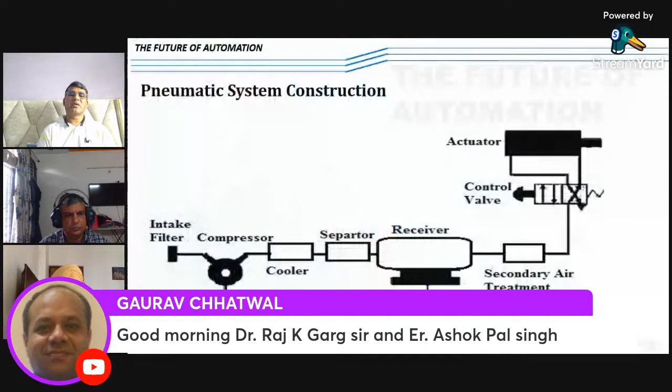When we intake the air from the atmosphere, there is a lot of water in the air, and that water is basically an enemy of any pneumatic system, so it is taken out through the cooler. Then there is a separator to separate out the impurities, and further there is a receiver to basically store the compressed air. Then in this receiver, there is a pressure switch.

The pressure switch is basically used to automate the system. Whenever the pressure we have set in the compressor is not achieved, the compressor will keep on working. As soon as that pressure, which we have set through the pressure switch, is reached, it will stop working. Then there is a secondary air treatment, which is further used to drive, and there is a control valve, what we call DCVs, direction control valves, and then the actuators. So this is a very basic structure of a pneumatic system.

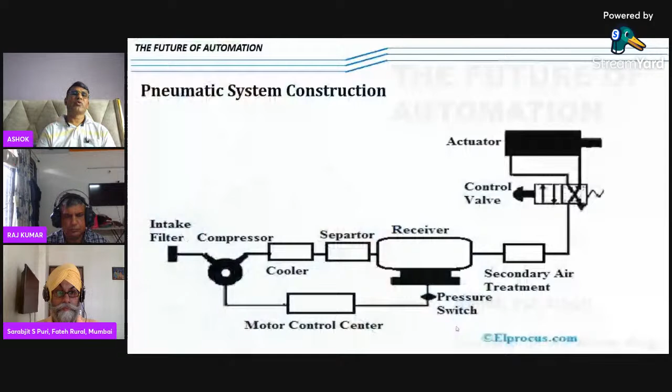So just to make you aware of all these things, I have presented this slide on usage of compressed air in industry. This is a pie chart showing the areas where compressed air is used, with the percentage for each.

The maximum air used is for air blow. Air blow is wherever in the process we require to blow the air, basically through blowguns, nozzles and all that. It is a part of the process, so maximum air is consumed in that.

Then there are actuators, which I explained earlier, the basic driving force from where we get the driving force. Then there is suction, which is basically vacuum - by compressed air we are also generating vacuum, that is another 9%. Then there is placement verification, which is basically checking gauges, whatever we want to check the diameter, perimeter, dimensions of the component.

Then there is air leakage, which is part of this system. Air leakage - 5% is the best facility maintained in the industry, that is the 5% leakage that will be there. If it is more than that, then there is need to check the leakages and arrest them. So this is the very basic usage of air in industry.

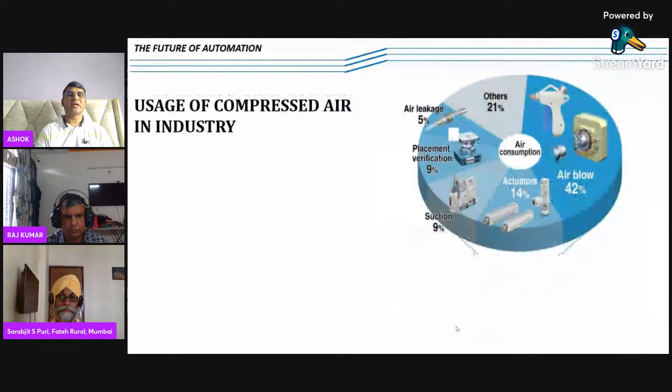Now there is electric power. How we get the compressors to run, that is through electricity. So total electricity consumption of any industry, as a generalized term, maximum 20% of the total electric power consumption is consumed by the compressor house. So you can imagine what a big amount of electrical energy is going into this.

So in today's world every industry is concentrating on how to reduce this electric power consumption. If there are leakages, then that is a wastage of electrical energy, and it is the costliest energy in the industry. Why do we call it the costliest? Actually it is not like that - we directly take the air, then compress it, and then give it to the actuators.

There are a lot of processes which compressed air goes through, and that is why money is involved - we need to put the system in like that. That is why it is the costliest energy in pneumatics, although the uses and advantages are very good. That is why compressed air is used in industry, that's the only good thing, but the cost is there. This is the truth - electric power consumption is 20% of that.

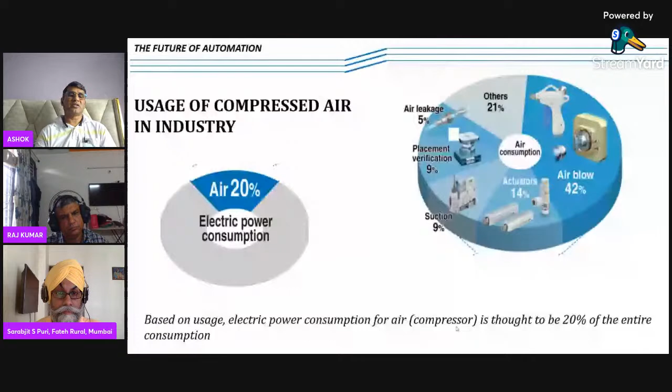So based on the usage, you can see the entire consumption. Now, why is pneumatic automation needed?

The future of pneumatics will be linked to smart sensing technology. Why are we using smart sensing technology? Pneumatics is used, as I explained earlier, to drive things. There are many applications run through pneumatics, but earlier we were not sensing that. Now, by use of the latest technology, we are sensing the movements of those actuators and all that process, so that we get feedback from them. Based on that feedback, we can check the health of the system, predictive maintenance, all that. These things are basically making our pneumatics smart.

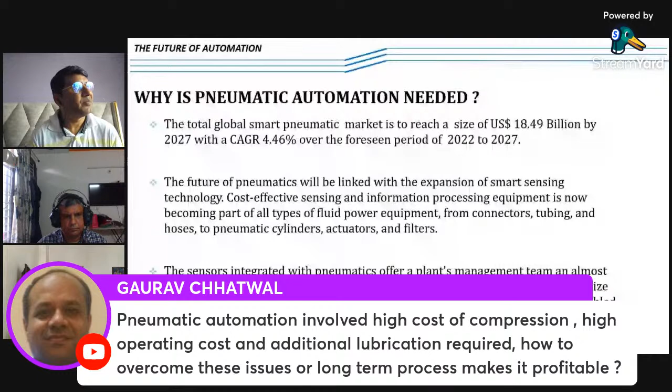Actually, costing will be high. Only thing is we have to make our system ideal, so that there should not be leakages. We have to have a monitoring system in place to monitor the entire system - stopovers in the machine and all those things have to be done according to requirement. That is the only way we can idealize our system and run on minimum leakage and wastage of air. Otherwise we can't stop the compressors from making compressed air - that is the way it has to be done. The thing is, we have to make our system smart enough so there shouldn't be any kind of wastage.

In any industry we've audited, we used to do air audits in the industries. Any industry not maintaining good facility is having a minimum 15 to 20% wastage in their system. So they are working on that, and it will again help industry reduce carbon footprints. Today, industries already have this target of reducing carbon footprints - that is another target for industry right now, and that is only possible by use of Industry 4.0.

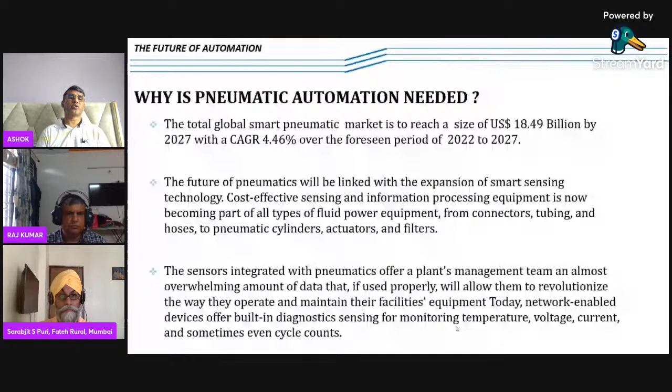So I will show you a small video of Industry 4.0, which is quite informational. It is a 2 minute video, you can watch it.

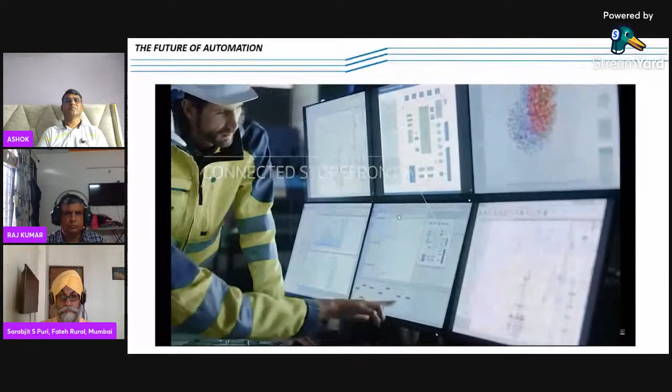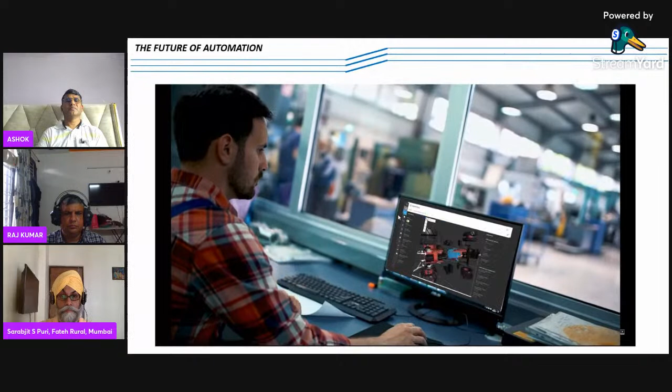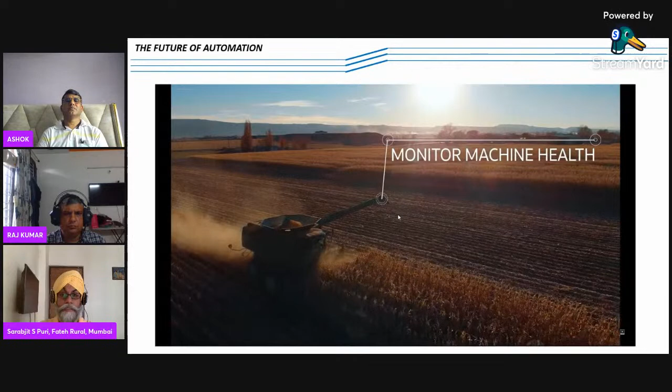Yeah Sarabjit, there is no audio in this. Otherwise on YouTube I think there is audio, but here it is not working.

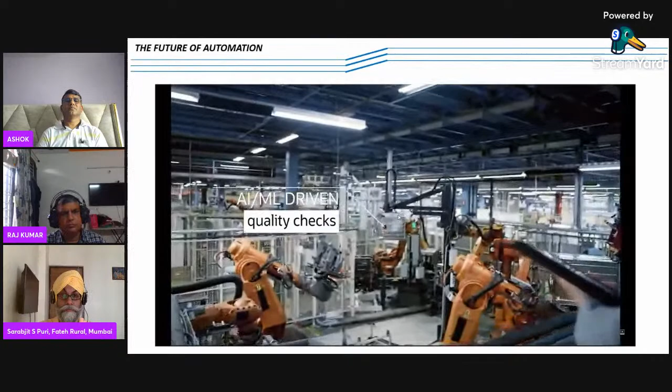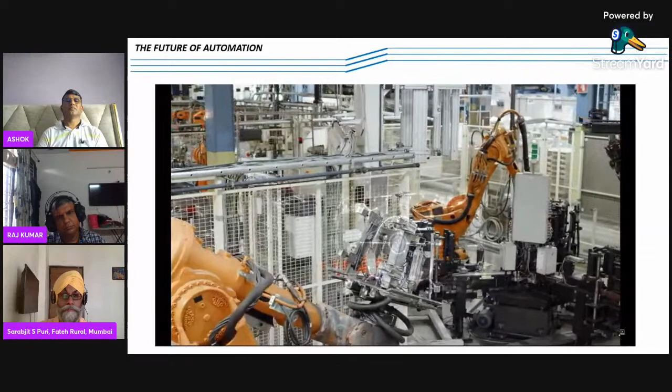Ashokji, you can explain a bit during the video. Okay, so what this video basically explains is how Industry 4.0 is being acquired by the industry. Starting from the manufacturing process, they are being basically integrated with the data, as I explained earlier. Basically digitalized - everything has been digitalized. All data is being connected on a real time basis. That is what this video is showing.

So it is going to end, I will just explain in the next slide. Actually, I don't know, the audio is not there - that is our issue.

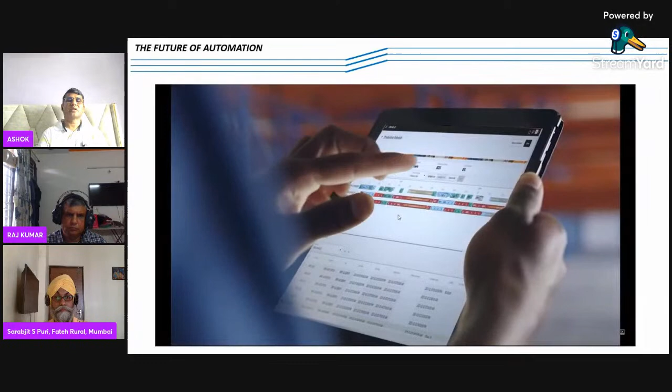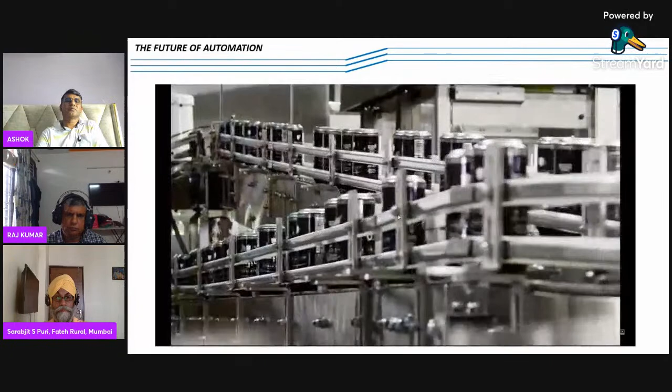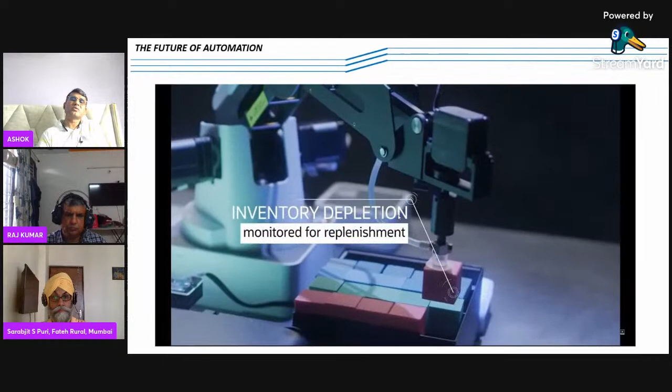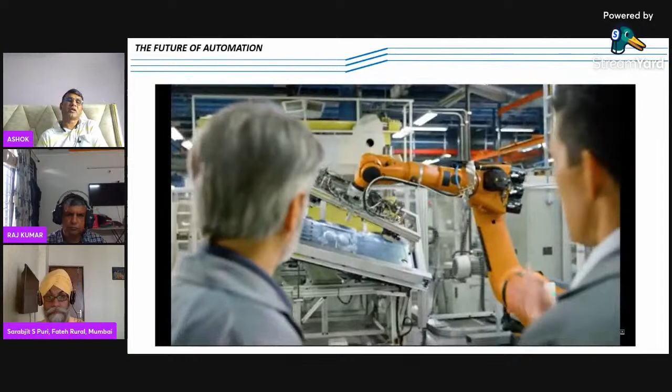This is what it is showing. So everything is being monitored, there is data which is floating through every process, and that is being shared according to the requirement of what is to be shown, what is to be told to the required department.

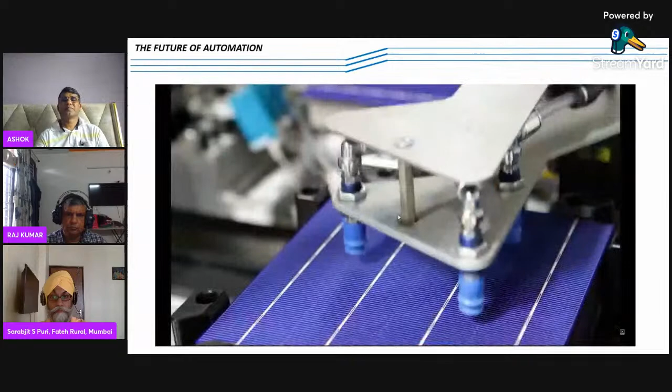There is a question for Dr. Garg: would like to know how Center for Training and Research in Automation is profitable for our college students, and how much they are involved in learning skills through this special job lab.

Okay, as explained by Mr. Ashok, automation is the need of the day, and we are connecting machines through Industry 4.0, all the machines. Basically, for Industry 4.0, we need all the machines to be programmable. That is, programmability is only possible if...

All our laborers, our students, labor is trained on these machines, because we have to train the technicians for the working of these machines. If we need trained technicians, trained engineers, then definitely we, at this level, have to give our students the exposure. For giving the exposure to our students, we have established a lab in collaboration with SMC Noida. SMC has supplied us a number of equipments at a subsidized rate so that our students can learn and understand the basic concepts behind automation.

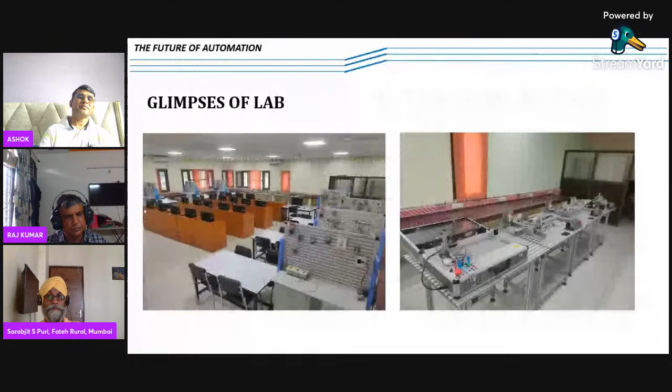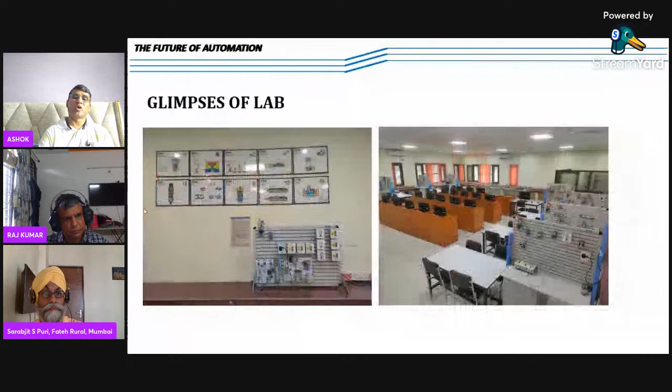You can see there are displays of cut modules and we have animated training programs - animated product photos are there to better understand the components used in pneumatics.

These are the kits that are there: basic pneumatic, electro-pneumatic, PLC based advanced pneumatic training kit, hydraulic sensor training kit, sorting and transfer workstation, e-learning module, vacuum training kit, animated pneumatic training modules for better understanding, cross-sectional cut product modules, pneumatic electro-pneumatic circuit designing software, and e-learning modules. All these are there in the lab.

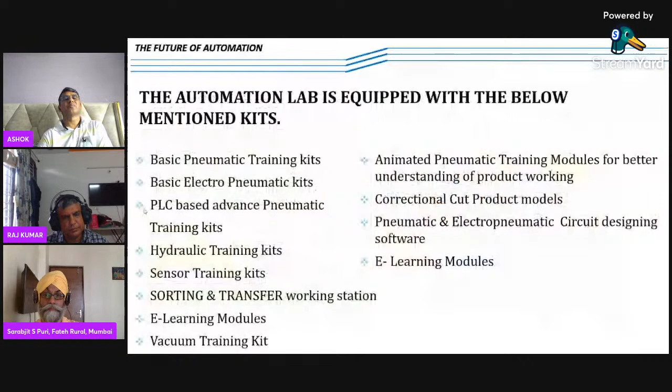Now I will just touch on the points of why automation is needed. The need of industry in today's time is higher production rate, increased productivity, more efficient use of raw material, better product quality, improved safety, shorter work weeks for labor, reduced factory lead times, more energy conserving methods, and reducing carbon footprint. These are the very basic points why automation is needed nowadays.

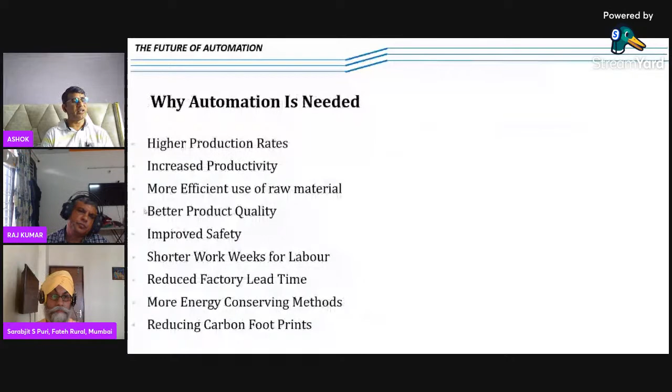This is a small video on 7 future trends in manufacturing. I will play this, but I think the audio is missing in this video - that is much more required. Let me play this. Otherwise, I can share these videos afterwards which will give you a very good idea of what trends are being followed in manufacturing right now. Okay Puriji? Yes, we will put it in the description. So I just played it.

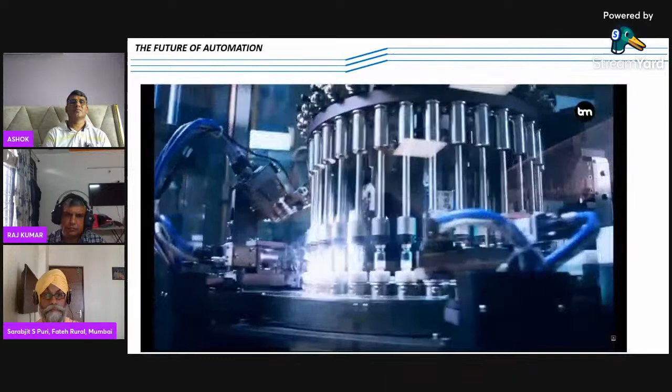You can see that these are all pneumatic and electric actuators being used in this.

Still, sound is missing. Yes. Okay, so we will put this video afterwards - there is no fun in playing this. Okay ji?

Actually, Industry 4.0 is implemented at the fourth and fifth level of the automation pyramid.

No, no, I think there is some technical hitch why the audio is not coming. That's okay, fine. So you can verbally tell what are the latest things happening so that people can have an input. Actually, okay, we can - I can tell that thing. Just a minute, let me play it again.

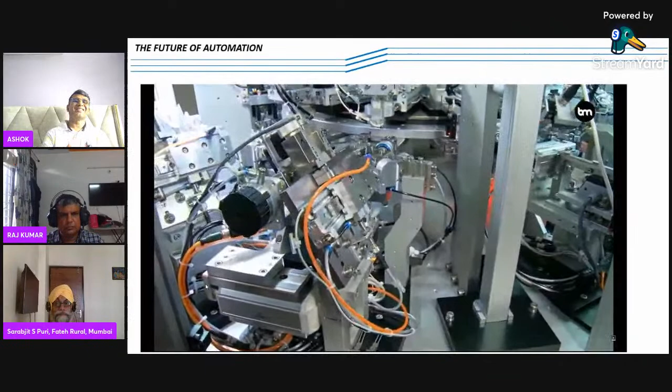Basically he is explaining that the manufacturing process has to be revolutionized. The major part of Industry 4.0 is concentrated on the manufacturing process. So he will tell basically 7 future things which are required in Industry 4.0.

So first is the Industrial Internet of Things. Let me give an example of how we understand this term. Right now, the flow of data - nowadays we are getting ACs, air conditioners, with smart features where everything you get on your mobile. While sitting at the office, you can see the AC fitted at your home - you can monitor everything, whether it is running efficiently or if there is any fault. You need to download an application on your mobile, and that data will come automatically to your mobile. So this is the Internet of Things being used in Industry 4.0.

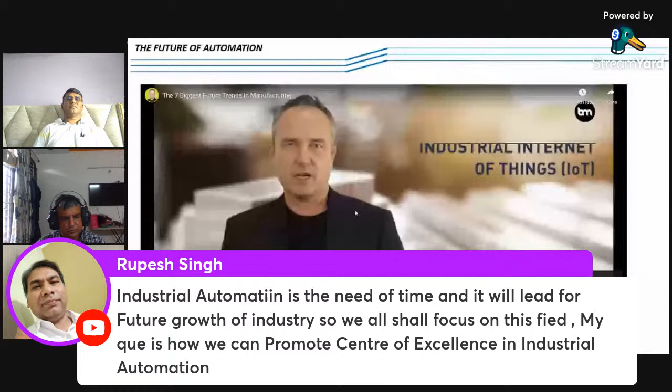I think Rupesh can answer that, being a person in marketing. I would like to say this particular video can go to everybody through word of mouth with the help of our SLIET Alumni Association, so that people working in industry can tell each other that there is something called Center of Excellence working in SLIET. Secondly, you can contact Dr. Saab anytime, and he can tell you when he is going to start classes on the modules, when training sessions are going to start, and what kind of trainings they are going to take on. So these things can be done with the help of our SLIET Alumni Association first, and second by putting up videos or doing some digital marketing.

So moving forward, this is the basic first feature of Industry 4.0 - data, basically a flow of data and data gathered. This is Internet of Things, which I have explained. If we have data, predictive maintenance can be planned. We know the entire health of the machine, so we can do predictive maintenance. That will stop production losses and your machine will run trouble free. So this is what Industry 4.0 is helping with, which is the main thing of Industry 4.0.

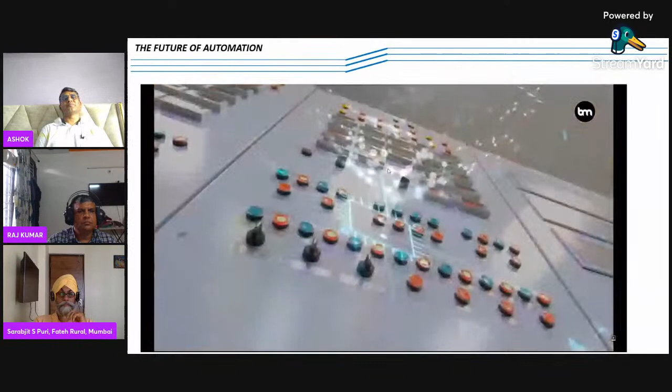So here comes the role of artificial intelligence also. AI is playing a major role in this. Now you know how artificial intelligence is working on that. I will give a small example of that.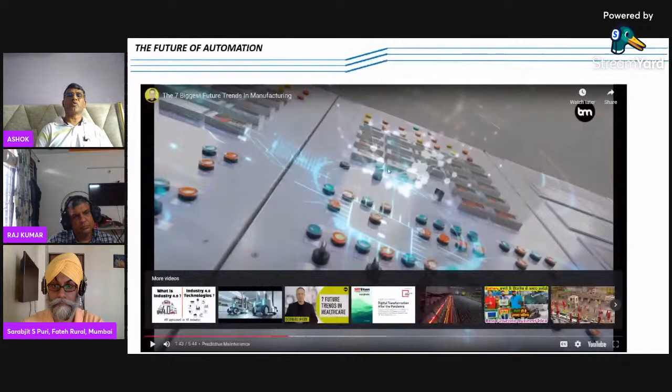In Australia, they are very much into mining, cobalt mines and all that. With the help of AI, they have gathered data through various sources and made an entire picture of the mine, so they can predict anything - where to go, where not to go - everything they can see from the outside. So with the use of AI, they have made a model of the entire mine, and sitting outside they can predict everything. This is how AI is helping in Industry 4.0.

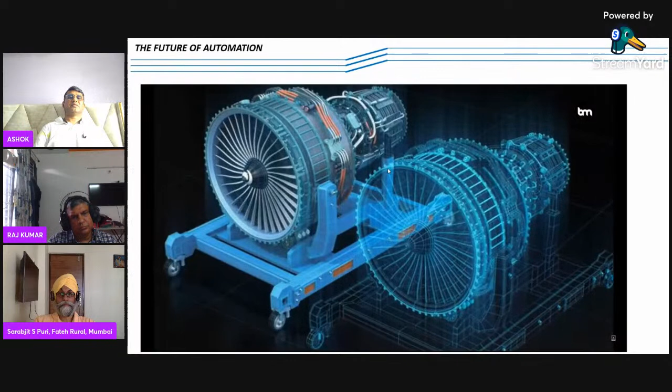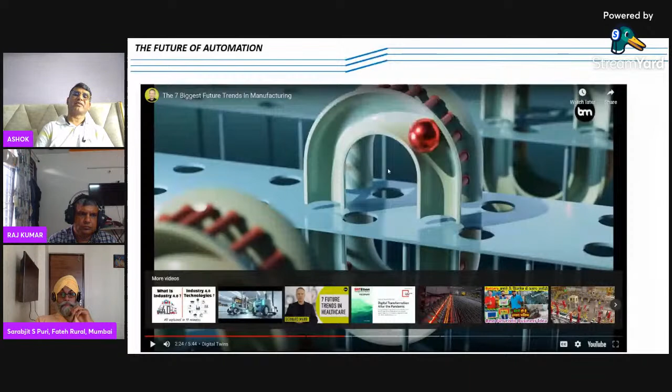Digital twins is basically creating another factory based on what has already been made - this is very easy now. This is what digital twin explains. By 2022-23, this will be majorly used by companies to produce digital twins of their factories. Since all the data is already available, it is very easy to produce, and less time will be consumed in making that thing. So this is digital twins - it's about planning, optimization, and all that.

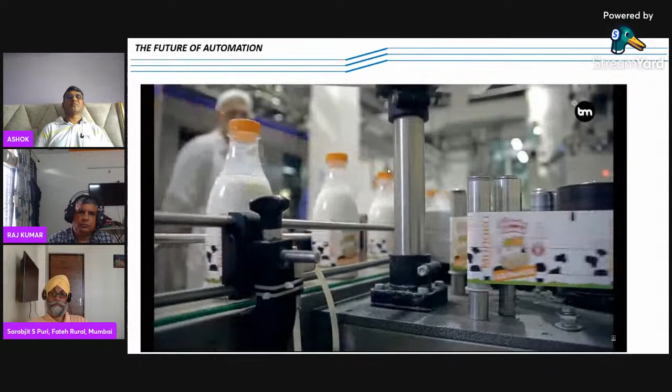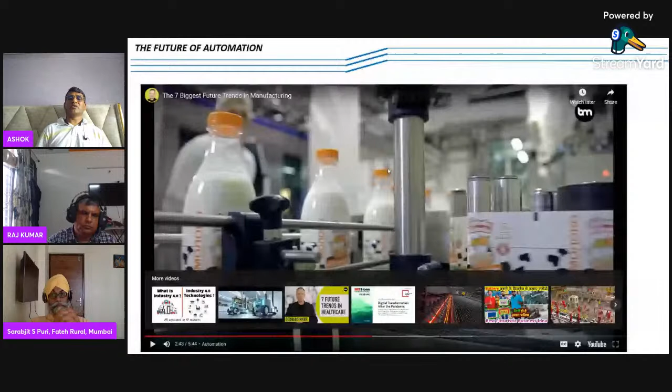So dark factories, automation and dark factories is what he's trying to explain. The factories will be like that - no person will be there, human presence will not be there. Robots will be working tirelessly in that factory. This is going to revolutionize the industry in coming time. No person will be there - only people will be sitting outside monitoring the processes. Robots will be working. So this is another term related to Industry 4.0.

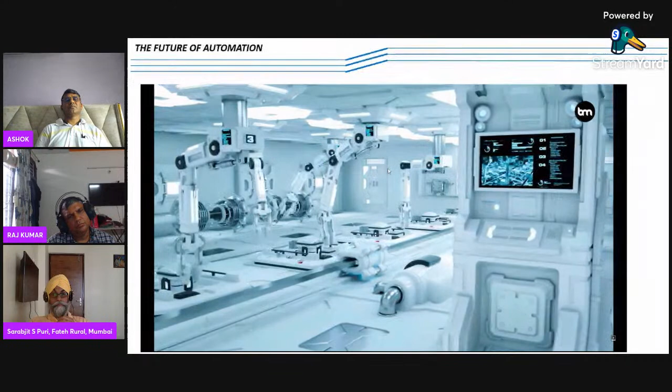There will be no direct human intervention in those. The major component of Industry 4.0 is robots and cobots. The difference between robots and cobots is that cobots are robots which can work with humans - robot and human person can work along on the same line. These are the cobots, and they have sensors in them. Whenever they come into contact with any person or anything, they will stop then and there only. They will not cause harm to the person. These are basically the future robots, what we call it.

These are the robots you've seen in automation factories - they work tirelessly, or you can say 24 hours, 365 days. They don't get tired like humans. So these are the future of Industry 4.0. Cobots will be in the dark industries basically - yes, exactly. Where there is no human intervention, robots will be working in the factories, and it looks a bit dangerous also.

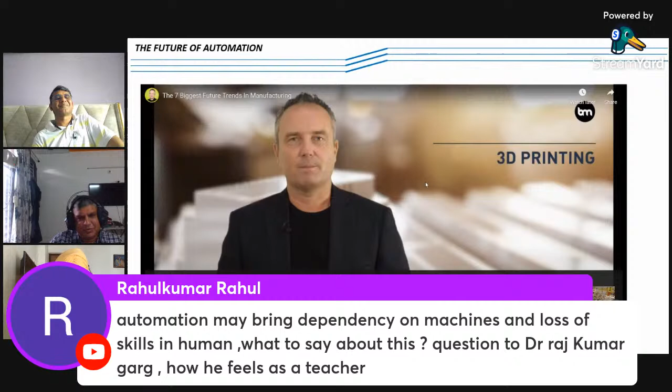Dependency on machines and loss of skills - definitely the jobs which were being done earlier by human beings will now be done by machines. But machines come through automation.

Machines are developed by persons. If we go in depth into automation, definitely some people who don't have in-depth knowledge regarding automation may be affected - those doing repeated jobs or unsafe jobs, because from a safety point of view we need more and more automation.

They can get affected, but with the advancement in automation, definitely more and more jobs will be created. Different types of jobs will be created, and human beings will be involved in running the machines.

After some time, all the operators will become engineers, and the engineers will directly interact with the automatic machines. I think what will happen in the coming days we cannot predict right now, but definitely more jobs will be created.

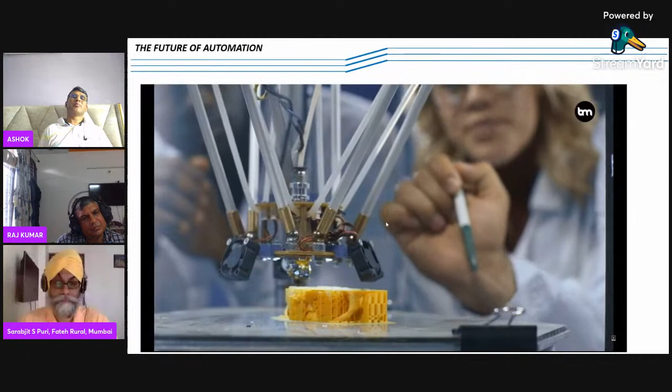This is the sixth future trend of Industry 4.0, that is 3D printing. Every person is aware of 3D printing - we can create a similar, same-to-same thing by adding material. So that's what 3D printing is. Earlier this was not possible using traditional machines, so making a copy or duplicate of anything was not possible. But now it is possible through 3D printing technology.

Earlier we were removing material to try to copy things. Now, with 3D printing, it's done by adding material to create a model of anything. This is possible right now - this is the sixth future trend of Industry 4.0.

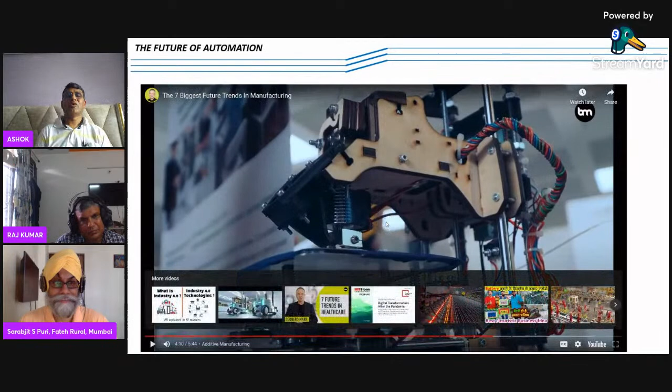So the seventh future trend is sustainability, which is the biggest thing - it should be sustainable. It should not be that today it is there and tomorrow it is not able to be maintained, or eliminated. Sustainability is the seventh future trend. Everything has to be developed like that, it should be sustainable. So that is the seventh future trend - sustainable production, as I have mentioned.

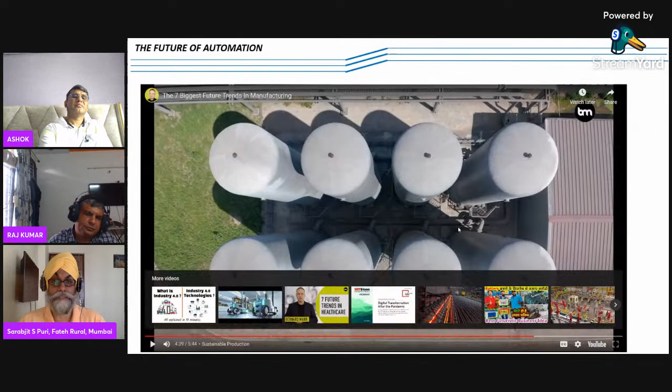So there are many new things coming up, new technologies like 3D printing, Internet of Things, and finding out faults before they actually happen. So a lot of things are coming up in Industry 4.0, and this has been described by Mr. Ashok as well as Dr. Garg. Fantastic, Ashokji. We can take up the next slides in a bit quicker mode.

According to the latest data available, the global worker shortage is pushing about 35% of companies to invest in automation, which specifically augments the abilities of both manufacturing and service. So manufacturing processes have to have less variability than human workers, resulting in greater control and consistency of product quality. Also, increased process control makes more efficient use of material, resulting in less scrap. So this is the need for automation professionals.